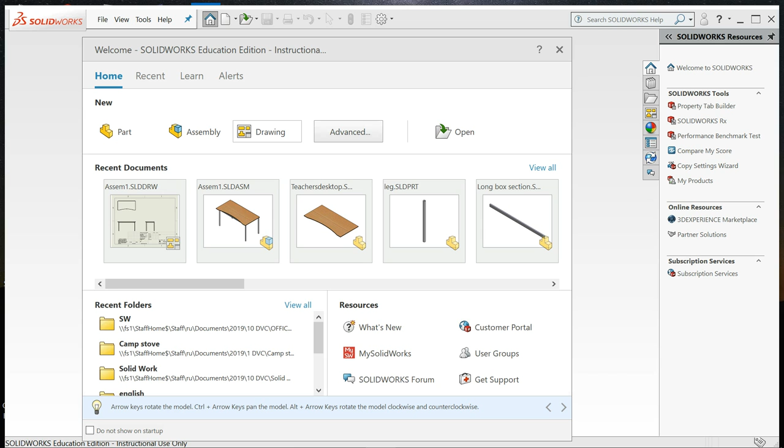Okay, if you've drawn your parts and assembled the whole thing, we can start doing our orthographic, which will be one of the externals. So if you click on make drawing from part, you have to use the template that's available in the student shared folder. So we'll untick that box, browse for the template, and then you'll go to documents.

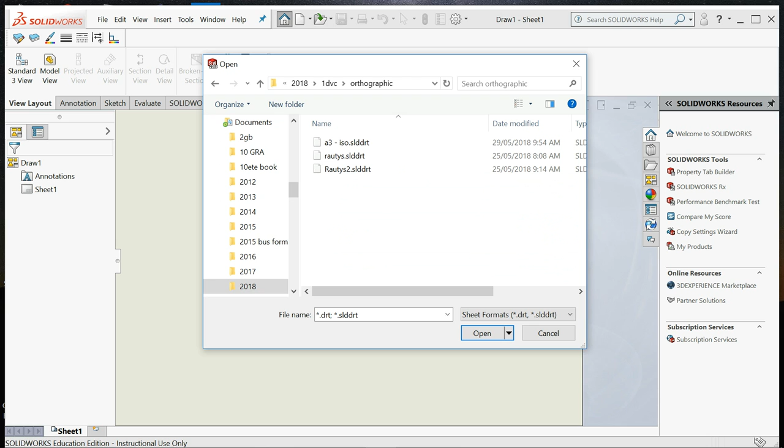I've saved mine here. You can save yours on your drive as well, on your computer. So level 1 DVC, orthographic. When you see that's a preview of the thing, that's everything you need for the external on your orthographic. So you okay that. Then you have to edit the sheet first. So you go to sheet format, edit sheet, and then you can click on, say, your name.

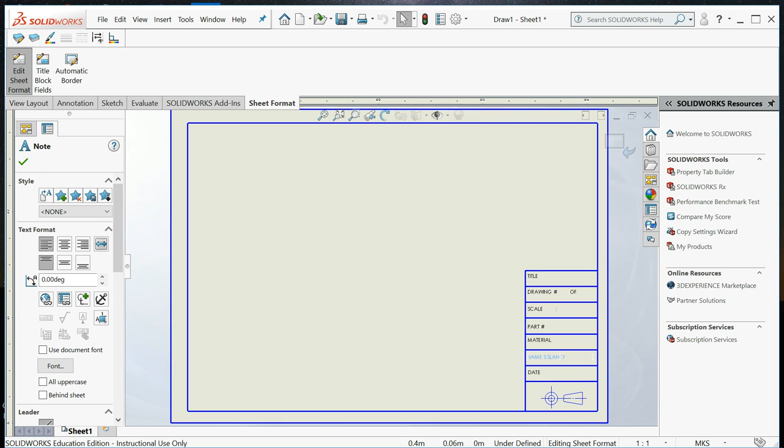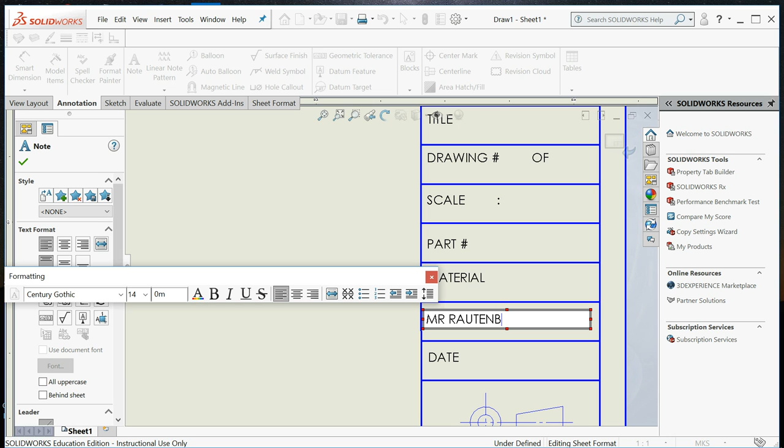Keep the caps lock on because you want to keep it in capital letters to work with the standard. So you can scroll a little bit closer. So if we go annotation and then notes, and then we click on there, escape. If you double click on there, you get that block, and you can just put in your name and surname. It should be all in capital letters as per the standard of orthographic drawings, the New Zealand Australian National Standard.

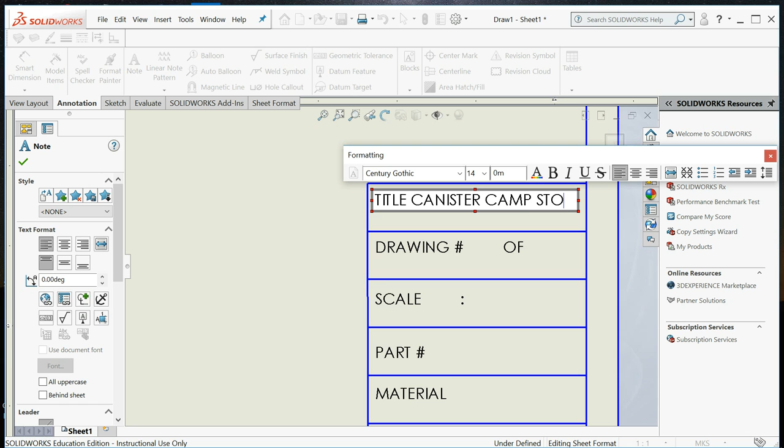Now you can put your own title in: canister camp stove. So you double click on that, and if you click on it, you can just say canister camp stove. And then say you've got 10 drawings, this can be 1 of 10, or say you've got 4, it can be 1 of 4.

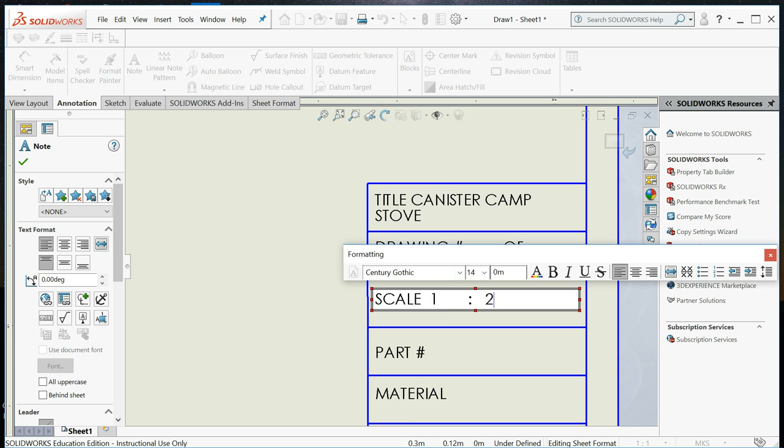Then your scale is quite important. I think a scale of 1 to 2 will probably be sufficient for most parts. So you just click on that and put 1, and then 2 after the double dot, so it's half the size. And when you draw here on the bottom, you just have to make sure the scale is right as well. So that's all I'm going to put in for today. And then a date, any date that you can put in, and there's your third angle orthographic symbol already.

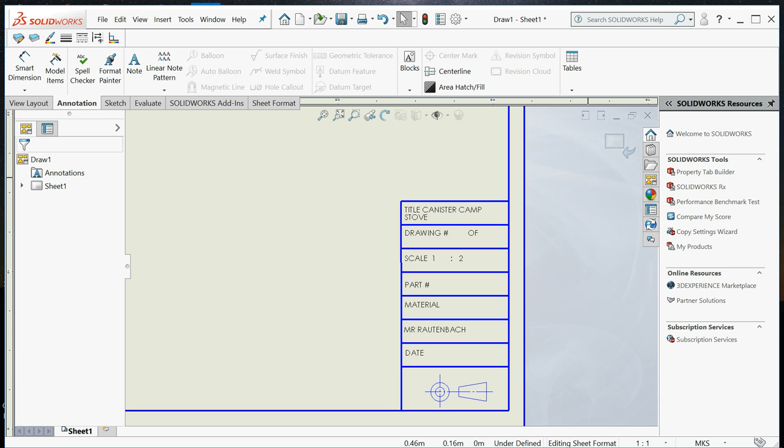So when the marker is going to mark the external, he's going to look at your title block and make sure you've got your scale, the material, your name, the date, and the third angle orthographic symbol. Then when you're happy with that, you can go here and exit the sketch, give it a green tick as well, and that will take you back to the normal view.

So if you want a quick layout, you just go view layout, and it will give you 3 standard views. So you click on that, then you have to browse for your drawing. So I'll just go to the drawing that I saved. Remember to save it under the right names. Call it burner, call it pot holder. Don't save it under funny names, because at the end, if you create a parts list, SolidWorks grabs the name of the part and saves it like that.

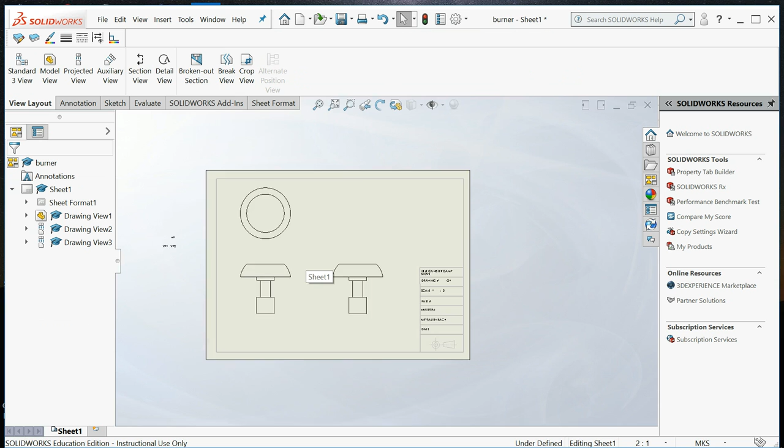So here's my burner. I want to make an orthographic of my burner. So I'll just click on that, and that looks a little bit oversized. So I'll just do it on a scale of 1 to 1 maybe, and that looks a bit better. That gives me more space for everything. Remember, this is an A3 format, so you don't have to make it so big.

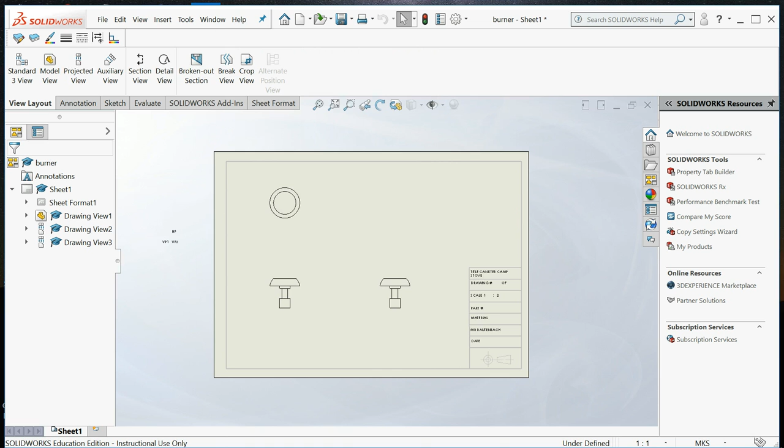If you don't have the line format tool, you have to go there, go to customize, and then scroll down until you find the line format tool, which is this one, and that will give you all the line types that you need for the orthographic. So once I've put my 3 views there, I'll show you how to put the lines in. You go to the phantom. That will be a folding line between the horizontal plane and the vertical plane.

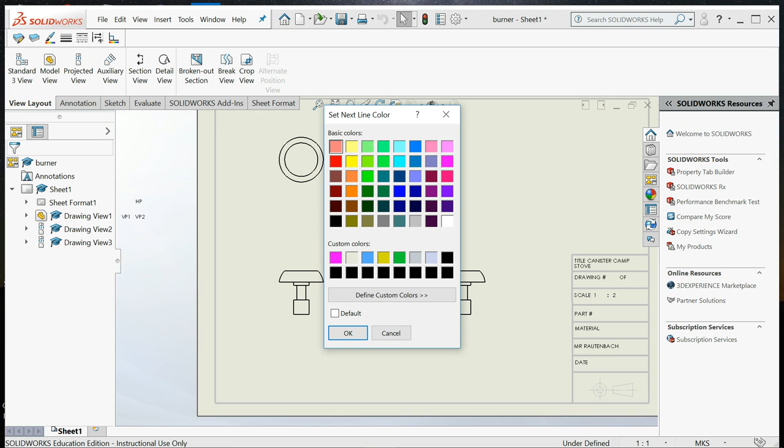So what you do is click on that, choose the thinnest line, click on this one, and choose the phantom. You can even go with a grey color instead of black, because it should be a construction line, lighter than your outlines. So I'll go back to sketch, choose the line tool, and in the middle of the 2 drawings, if you see the 180 degrees appear there, you know that it's exactly horizontal, and 90 degrees will give it 90 degrees.

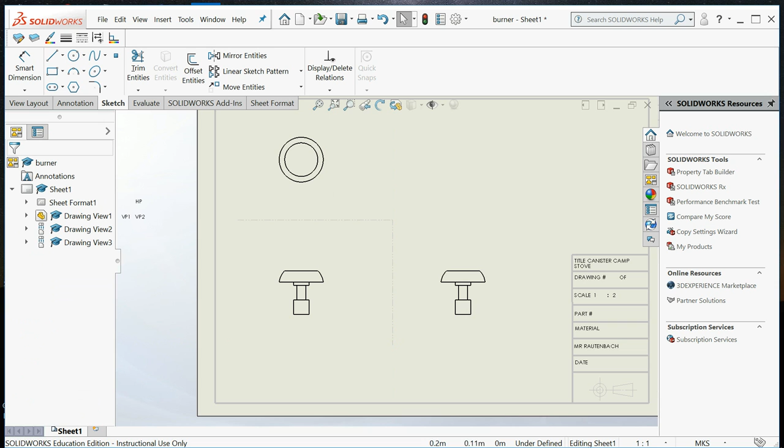The rule of thumb is that the folding line should be at least 20 to 30 mils on this side of the sketch, and 20 to 30 mils at the bottom of the sketch. Then I'll go back. You have to reset the pencil the whole time, so I'll go to default, the default line, choose my line tool again, and here we need a 45 degree line. So if you scroll up a little bit and put your line there, you just go to this little block and you can change it to 45.

I normally just go until it's 45. You can see it's 45 in that block now, and also about 20 mils higher and 20 mils on the right of the sketch. So click on that, and there's my line tool, and you can press escape.

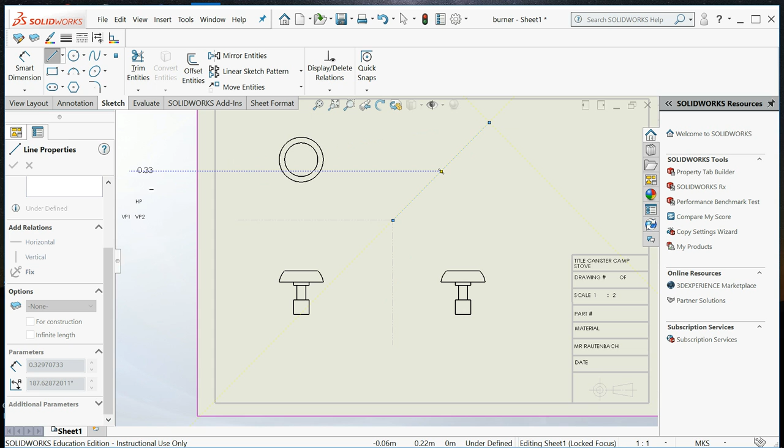So if I scroll in a little bit, I've got a solid line there and 2 folding lines. Then we have to label the planes. Go to annotations, note, and we'll call this the horizontal plane. Remember, caps lock still on. Horizontal plane. This is the vertical plane.

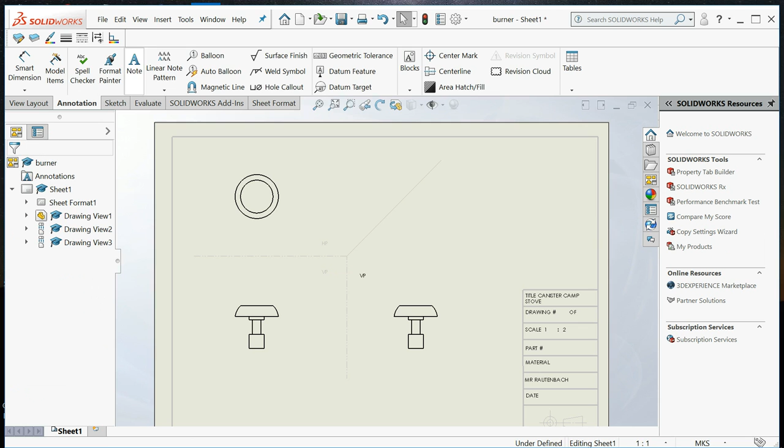So if you go to your note again, here we'll put in, see that yellow line, it shows that it's under that, so vertical plane. And then here we'll do another vertical plane, so we'll go to note, another vertical plane in line with that vertical plane, so vertical plane.

That's another thing that the marker will look out for. So you've got your folding line, your center line, then your leader lines between the sketches, so you need to have that in for achieved as well. So I'll choose the thinnest line, and then you have to be really accurate with them.

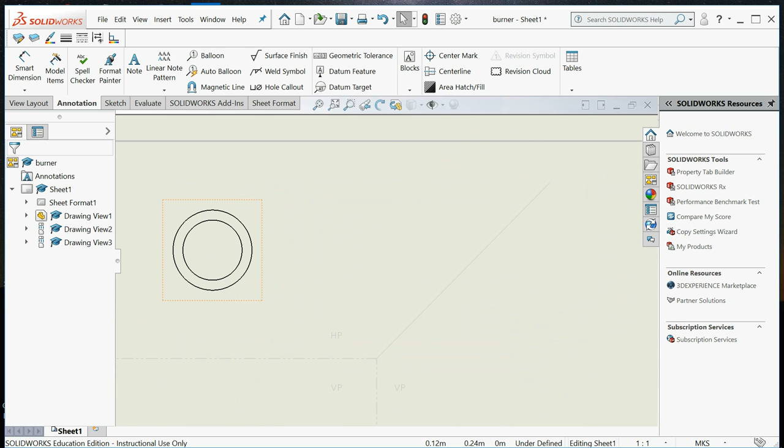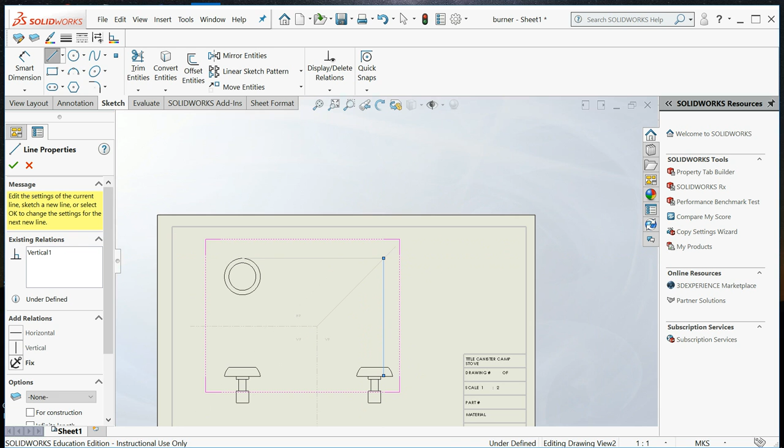So you can scroll in a little bit, choose your sketch, your line tool, and go right to there, making sure you're on that yellow line 180 degrees, and make sure your line ends up on the line there. And when you go down, make sure it's 90 degrees as well. So this one should meet up, press escape, this one should meet up with that corner there.

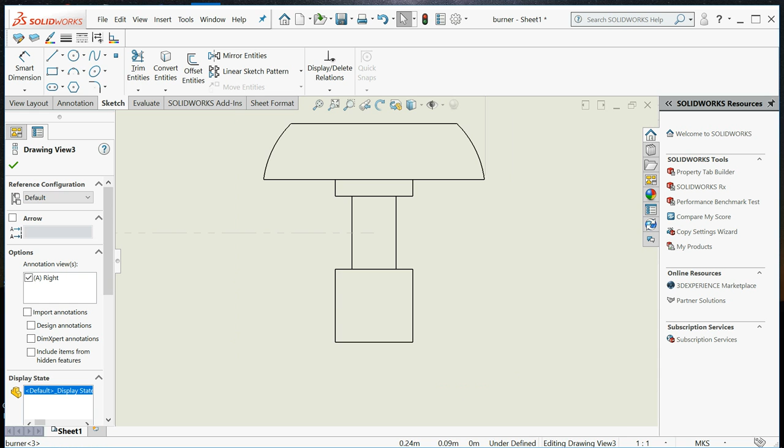So I'll have to move the sketch to make it in line, so you'll just move it until it's there. If you want to make sure, scroll in with your scroller wheel and make sure that is in. So then you'll have to do that for all the lines, all the points need to have that in. So I'll go exactly there. Then you'll have your other lines and lines across there.

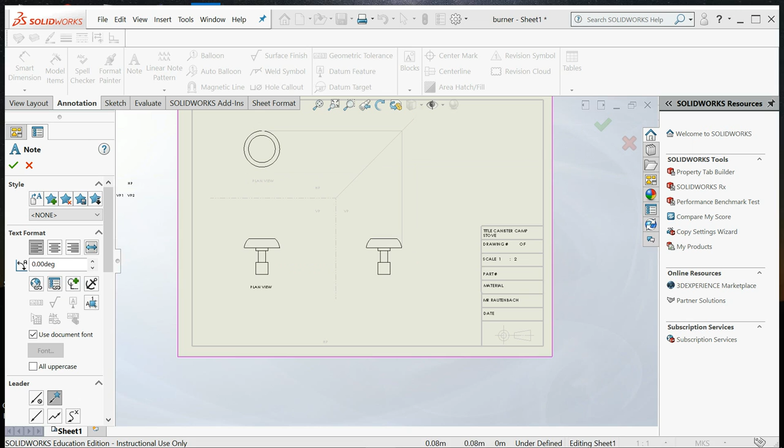Then you have to label your views as well, so that's done with the note tool again. Right under the sketch, I'll enable this one, plan view. I think that comes from the architectural, because you'll have your floor plan there. Then here you'll have your main elevation, so I'll click on that, delete plan view, and write main elevation.

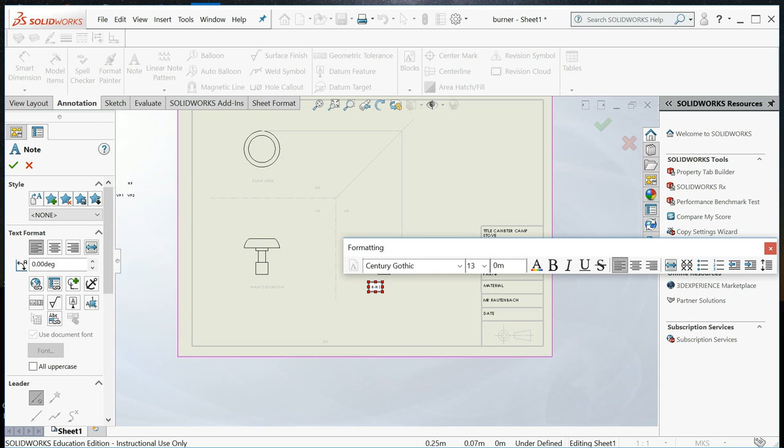And here I'll do my right hand elevation, but you can just see that yellow line shows that it's in line. So you'll just type in RH or R-H elevation, and that gives you the label to view.

So when the external marker is going to mark your work, first of all you will look at your title blocks. Do you have the title? Do you have what drawing if it's more than one? Do you have your scale? And is this right? Did you put your name in? Did you put the date in? Is the orthographic symbol there?

Then you can go, do you have your views labeled? Do you have your planes labeled? And do you have the folding line in there? And do you have all the leader lines?

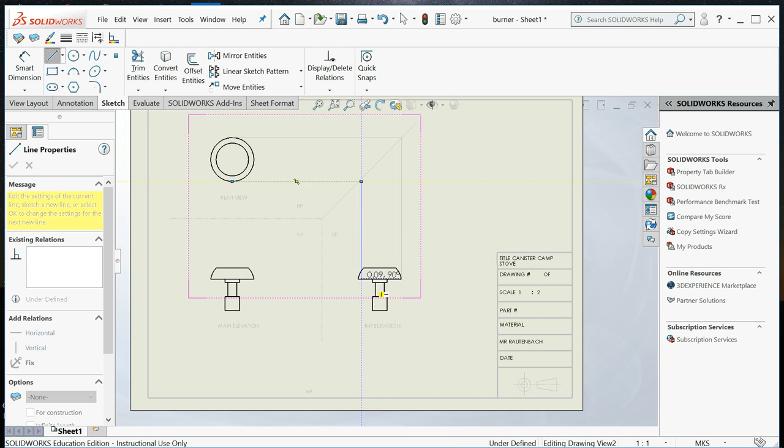So the next one will go down. If I go back to sketch, you have to have all your lines going down across to the 45 and down to your sketch, and then the same across there, and escape and across. So the line tool from the top there and across there, make sure you've got all the lines in. Oh, that one didn't.

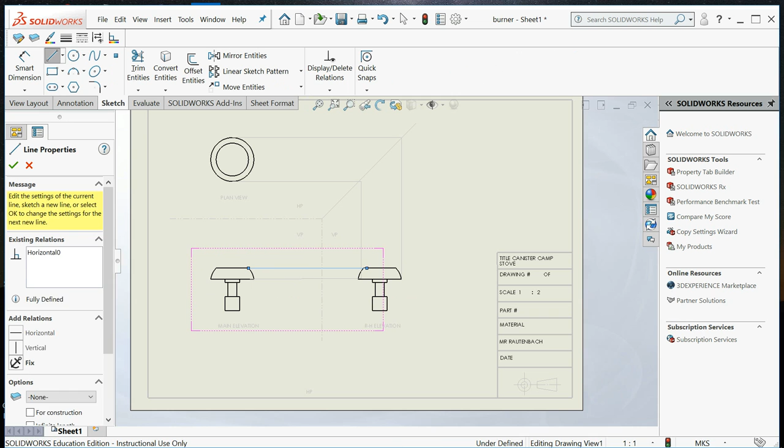So press Ctrl Z if you made a mistake, so I'll grab the line tool again, and go from there to there. So you can do this for all your parts, and then you can do one that's assembled.

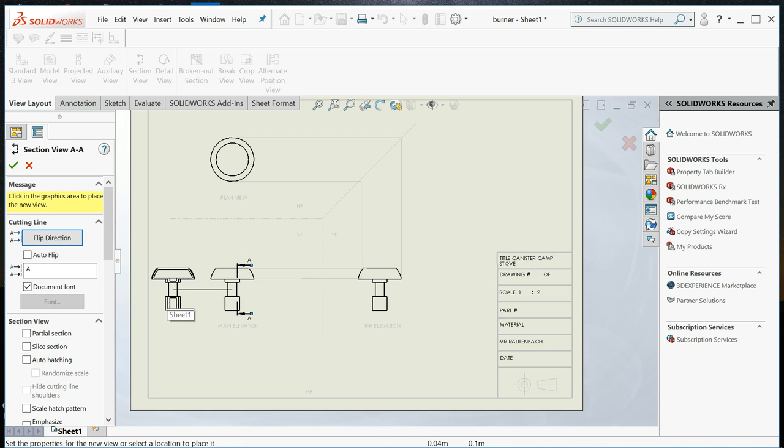The marking schedule for merit and excellence will be adding a section view to show assembly detail or hidden detail. So there is a section view tool that you can grab, and put it anywhere there, and it will give you the section of that view. So if I pull that out, that's going to automatically label it as section AA, and if you look at that, it shows that it's a solid material there. That shows hidden detail that you haven't shown in anything else.

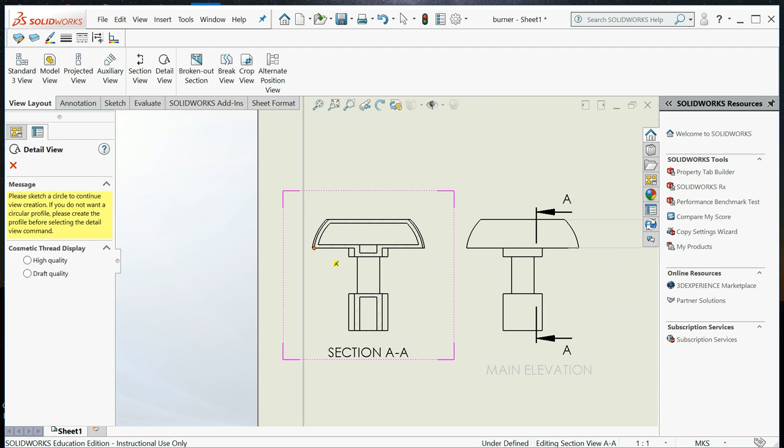Another thing that's quite cool is if you want to show somebody detail that's too small to show on the sketch, you can draw a circle on that, and that will give you that detail on a different scale, a little bit enlarged, which communicates your ideas even better. We'll move that a little bit up, out of the sketch, so that will just show B there. You can see B there, and that shows detail B.

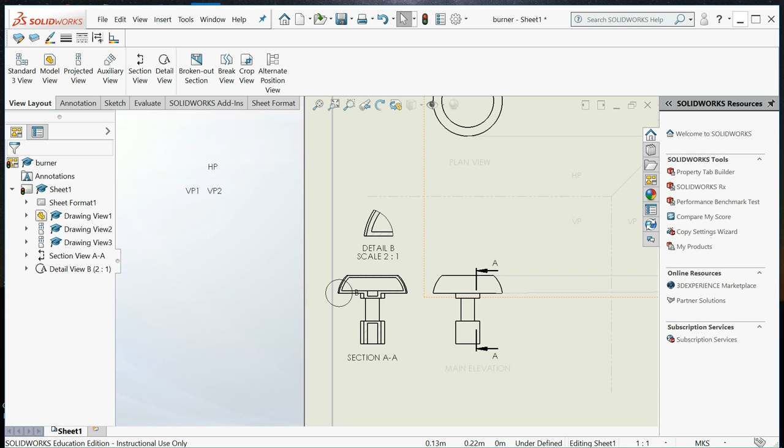It's a good idea to have all of this on. That's all for this video. Make sure that you have the right title or the right template, and then when you do your drawing, be as accurate as you can.